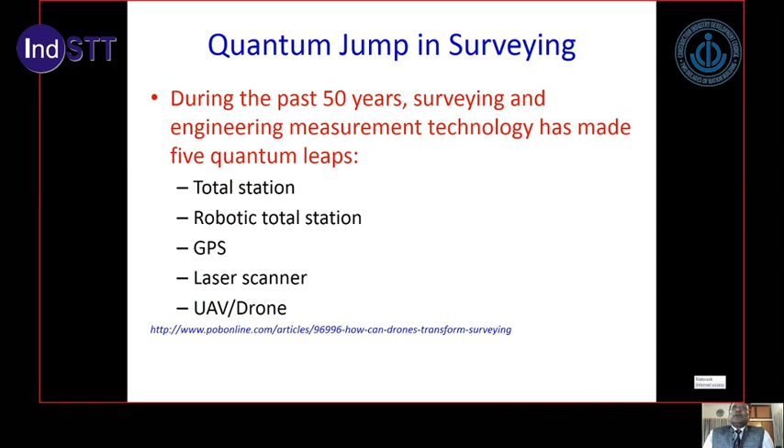Now, why should we use laser technology? This laser technology basically will give us very accurate three-dimensional coordinates even in adverse weather conditions. So that is why this particular technology is very useful, because we get a high degree of automation. It is safe operation.

It is less affected by atmospheric conditions because of fog, haze, or rainy conditions, sometimes we don't use surveying equipment. It's very efficient, and we achieve very high post-processing efficiency from this.

Now there are advantages and disadvantages of using this technology. The greatest advantage is that we get three-dimensional data, which is the ultimate goal of any surveying equipment. Once we get three-dimensional data, we can create a 3D model, a virtual model, and carry out measurements from those 3D models, getting accurate coordinates of the data.

The disadvantage could be that it requires experience to use, and the hardware and software are a little expensive, things like that.

Now let us see on what principle this laser beam based equipment works. We have a receiver in the instrument and we have the transmitter, as you can see, two boxes, the blue boxes showing the receiver and transmitter, and then we have the target surface. This target surface could be a building, a tree, or a tower where the laser beam will strike, and this will return back, and the reflected laser beam will come to the receiver, which decodes it and converts it into digital signals.

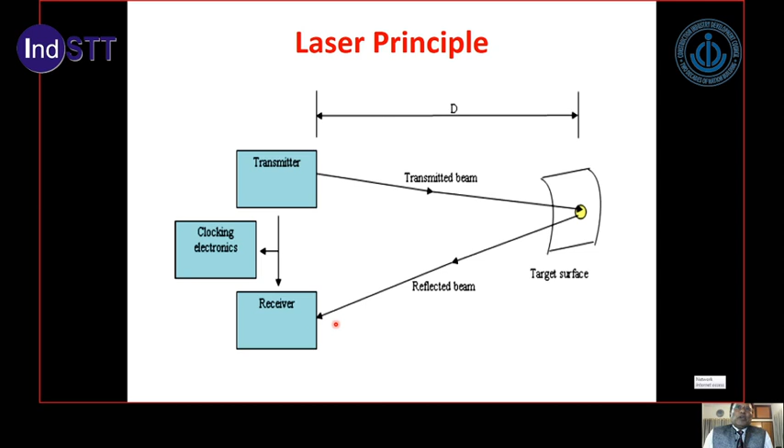We have three types of LiDAR systems: terrestrial laser scanning systems, which are used in surveying, then mobile laser scanning, and airborne. As is clear from the name itself, we have a system which you can mount on the ground, very close to the object, that's called terrestrial laser scanning. When you mount this system on a mobile system like a vehicle, that is called a mobile laser scanner system.

When you are mounting this system on some aircraft or UAV drone, it is called an airborne laser scanning system. I'm discussing all three here. This is a ground based system.

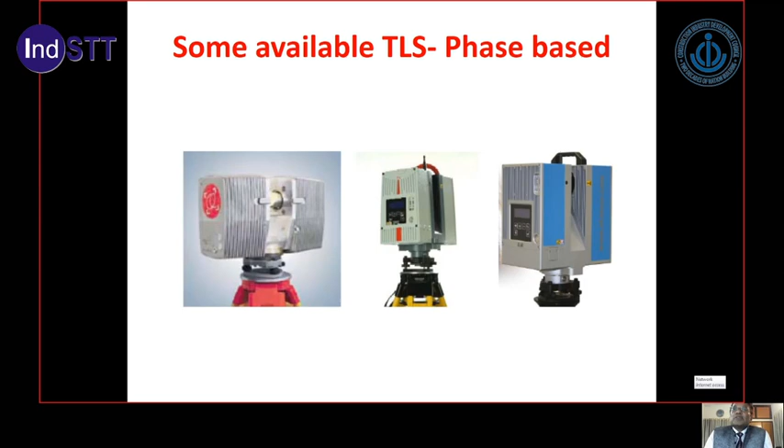These are some available phase-based latest equipment which are available in the terrestrial system. We can use them for a very large number of applications. Archaeology is one of the biggest applications, then architecture and construction is another big application. We are using it for heritage preservation, and we are creating virtual reality.

In addition to these applications, we are also using these for slope stability monitoring, like landslide monitoring. We are using it in the forestry sector, shipbuilding, forensic, biometric. So you can see here that it is not just land surveying, but we are using it for multifarious applications.

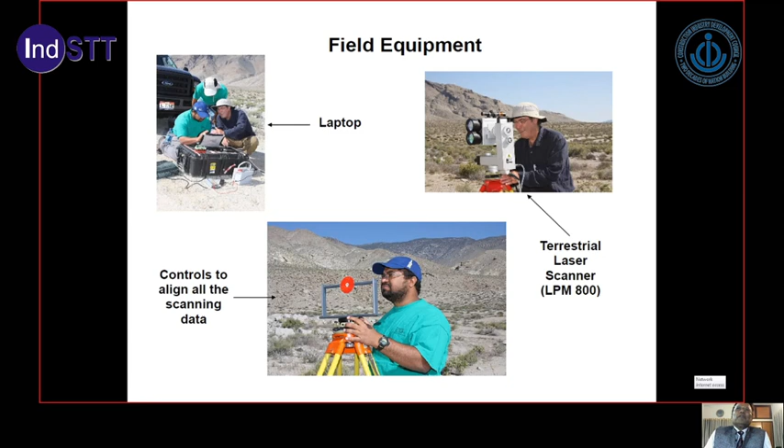Now how the instrument looks like, you can see the top right figure, which is the terrestrial laser scanner, and top left is the laptop device which is connected to that, and a power source, and there is a target on the bottom. So these are the devices which are required, and you can see in this diagram that on a building face several measurements are being taken with the help of the terrestrial laser scanner TLS system.

The dots which you see on the face of the buildings are those points where the laser beam is exactly striking the building and collecting three-dimensional X, Y, and Z data from these points. So a very large number of points of data will be collected, and these are called the cloud points. So you can actually recreate the entire building.

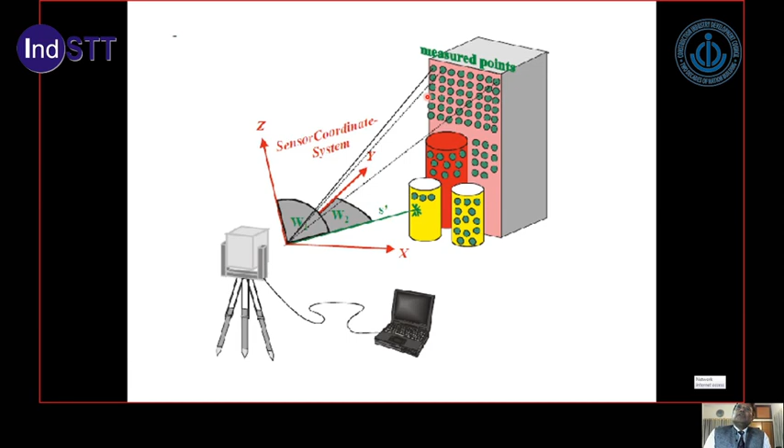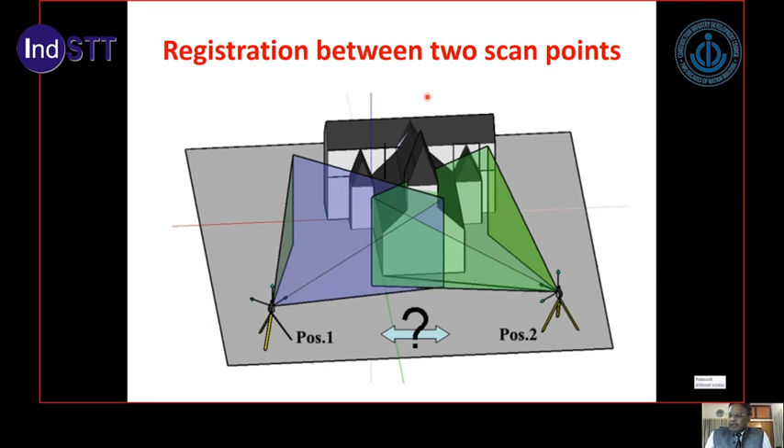Now we will also like to create a 3D model. So that means we have to use the photogrammetric principle, and we are capturing the image from different positions. So different positions will give you the overlap also, and the correct geometry you can recreate for the object.

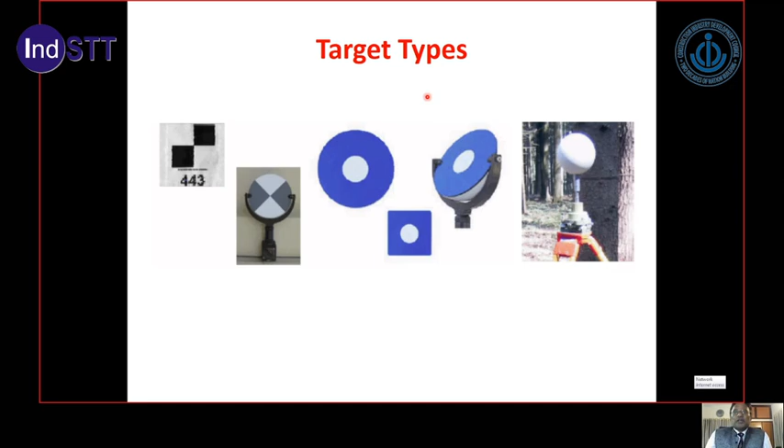Now on the building face, or maybe on a dam site or on a tower, we have to install these target types, and sometimes the coordinates of these points are also known to us, so they act as a reference point. So if I put these on the face of a certain building or structure and I know the coordinates, I can use them as GCP's, ground control points.

But the modern device can take the data all around you automatically. So it has made the surveying work easy, data collection work very easy, and you can collect a large amount of data very easily, quickly, and very accurately with the help of this kind of equipment.

There are certain technical steps which one has to follow in order to get the correct data. So we start from the survey plan, we carry out the field operation, then we go to the data preparation and the data registration with the help of the ground control points. Then once you have collected the data, you need some kind of software, and that's your data processing software. And then once you have done the data processing, then the last point will be quality control and delivery.

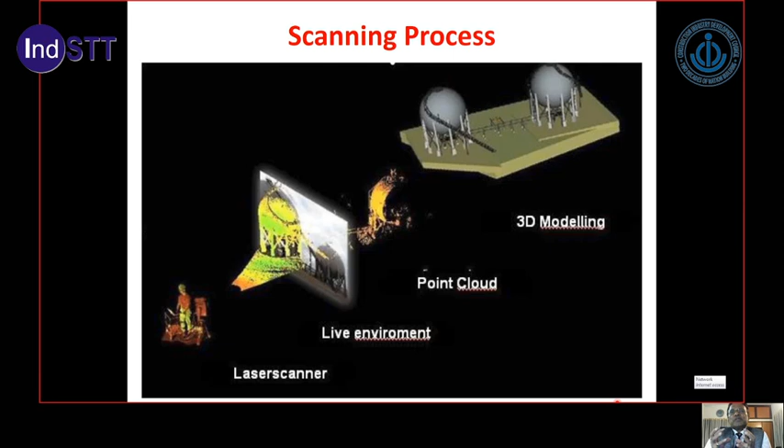A very dense point cloud data could be confusing. You are not able to see anything out of it because it is so dense, and every single point has three-dimensional coordinates attached to it. Now you have to do certain editing, cleaning of the data, and be selective about what you want from it. There are certain procedures one has to adopt, because the laser scanner will scan everything visible to it and will have the coordinates of those points.

We can use this particular data for dam sites, like deformation in the dam, bridges and deformation in bridges, towers and inclination or verticality of the tower. All that kind of study, the cracks developing in structures, can be very easily monitored with the help of the terrestrial laser scanner device.

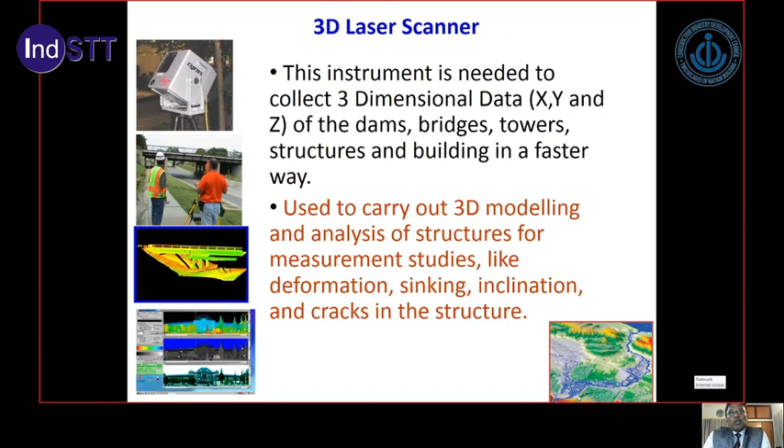Once you have this kind of data of the building, you can calculate all the dimensions of the building, carry out measurements, and calculate the volume of the building. People have also done studies on how much money would be needed for color washing or painting of the building. That kind of computation can be carried out with the help of this data.

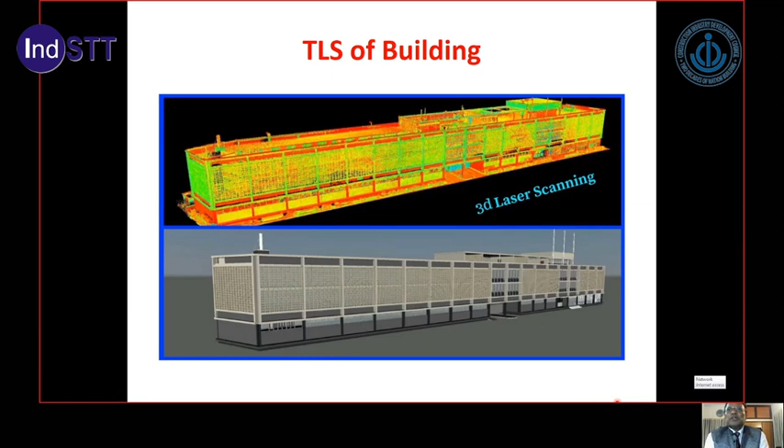The deflection in the bridge, when a train is passing, there is a deflection in the bridge. When a heavy load is passing, there's a deflection in the bridge. So whether the deflection is within the permissible limit, or whether the bridge is old and needs replacement, and so on, can be assessed.

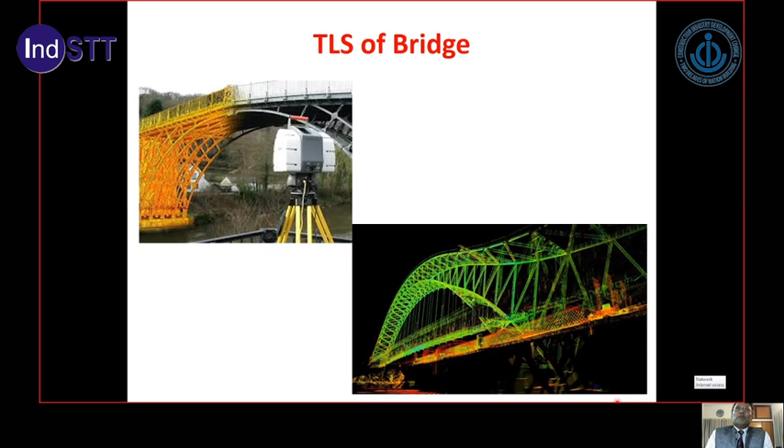In civil and infrastructure work, this is used for road and rail surveys, for volume calculations of material, for tunneling, for topographical surveys, and for monitoring the performance of structures. For all these purposes, we can use different kinds of laser scanners.

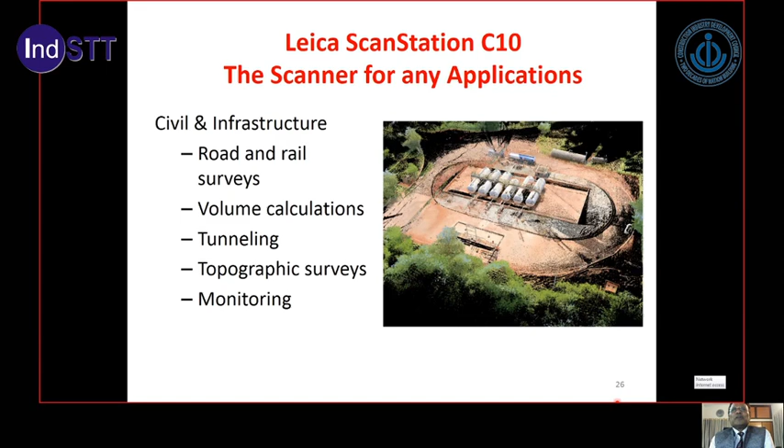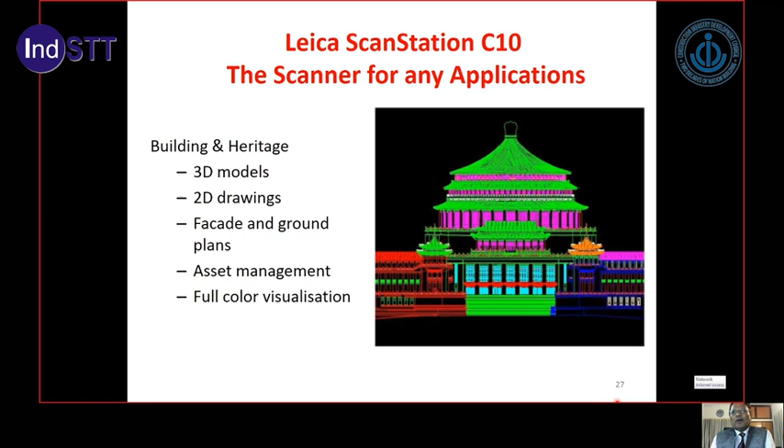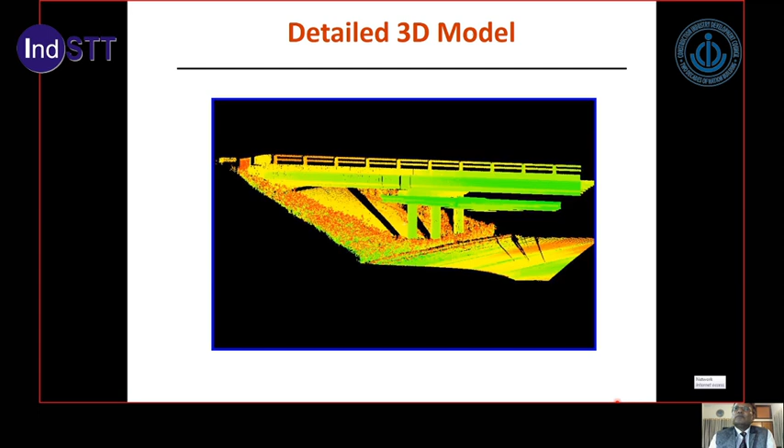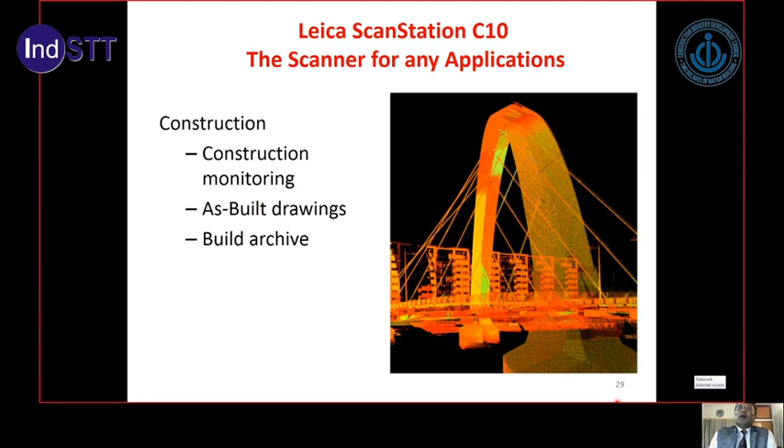This again shows the terrestrial laser scanner being used for the monitoring of the construction of the dam or the bridge site. From the 3D point cloud data, one can create these kinds of 3D models.

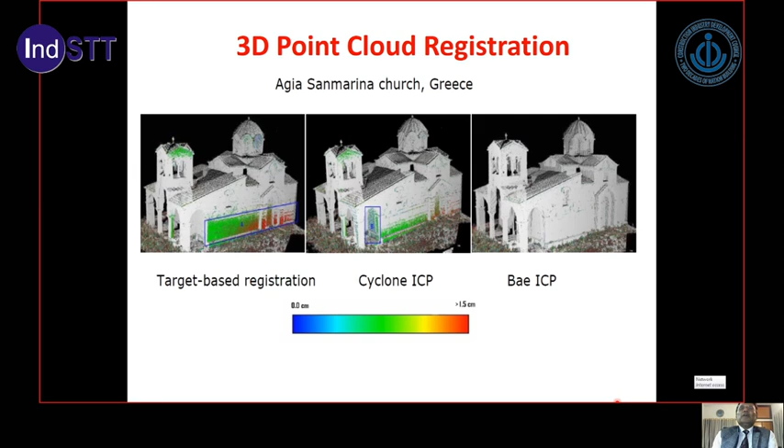The second category is the mobile mode of the laser scanner, where we have a specially designed vehicle, and we are mounting our system on it. This is the complete system which has been mounted, and it is equipped with the camera, the GPS, the IMU, and so on.

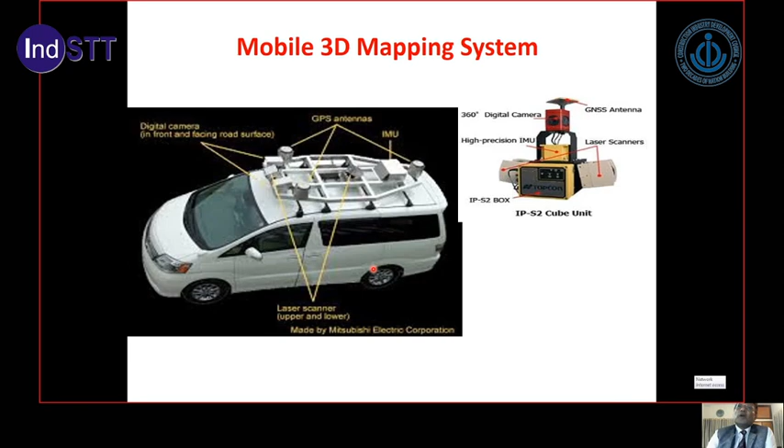So these are the details of this. You can see we have GPS devices on the top, we have the IMU, and we have a 360-degree camera here. This camera will take pictures in all directions as the vehicle moves. Then we have the laser scanner also, which will collect the point cloud data. So we collect both kinds of data, the image data and the point cloud data, and both are useful for different applications.

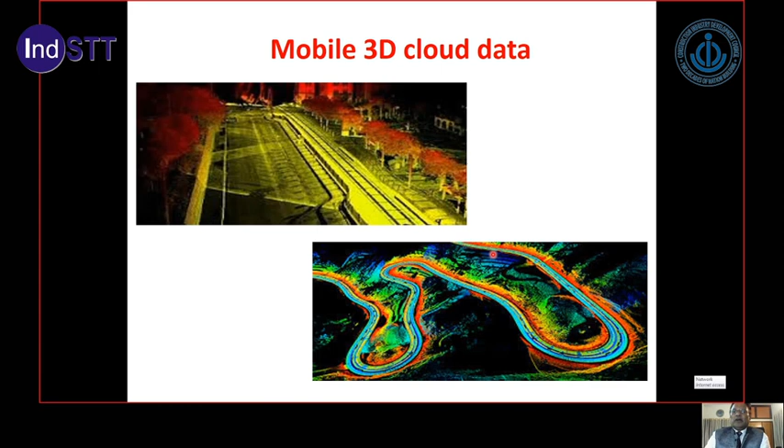Now you can see the bottom picture is the road, the entire mapping of the road and the surrounding areas has been done. This is a hilly region, which is why you see so many curves on the road. As you move in the vehicle under normal circumstances, the instrument is automatic. It will collect data on both sides of the road, as well as the backward and forward data, which is very useful in a large number of studies.

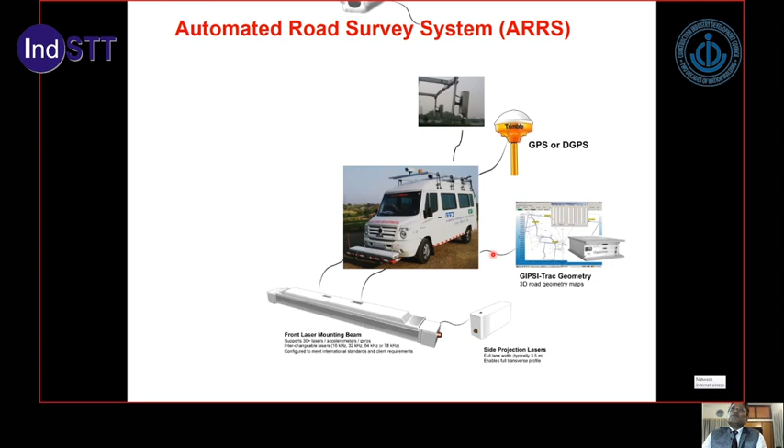This is an automated road survey system available with the Central Road Research Institute, and it is a very useful device with a laser scanning system. It has GPS devices fitted to it, it has a digital camera which takes images, and then there is the data acquisition system.

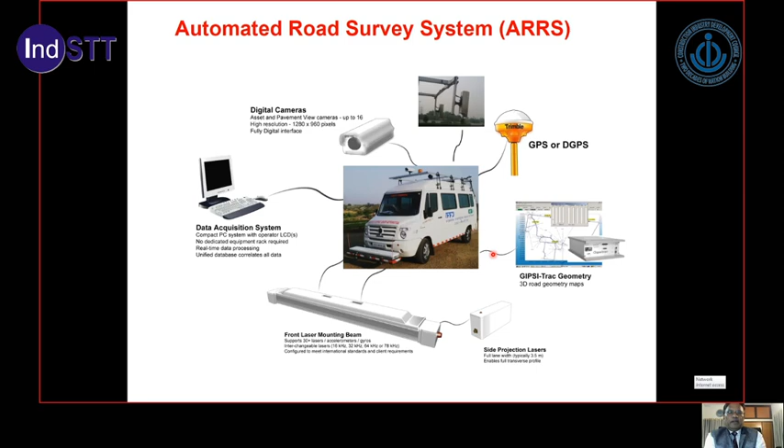Sometimes we have to carry out the analysis when we bring the data from the field to our office. But the advantage of this system is that you can do the analysis of the data in the field itself, in real time. There is real time data acquisition through a system fitted in the vehicle itself, and you can analyze and see whether your data is correct, and what the behavior is.

So this is a very useful equipment for maintenance of the road, for assessing its condition and stresses. There are potholes in the road soon after rainfall, so how much material would be required to repair those potholes? If cracks develop, or the road is bumpy, it can give you the entire profile of the road. In the front we have the laser profilometer, which scans the entire road system, and then the camera system takes images, while GPS gives real-time coordinates.

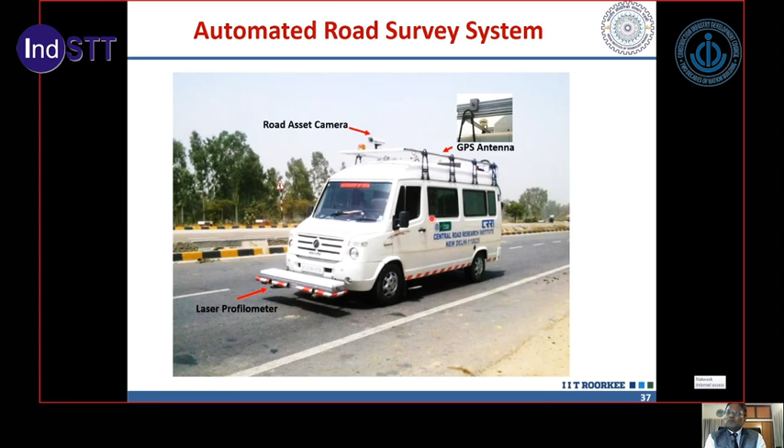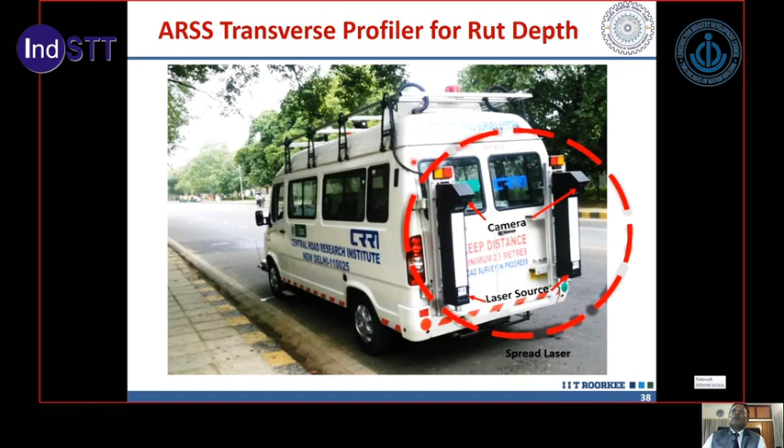This particular system has been used for a PhD work which has already been awarded. You can see these two laser scanners and the camera systems mounted on the vehicle. The two camera systems on top take images, and these images from the left and right cameras can be used to create a 3D model using the photogrammetric principle. So this is like a moving lab.

This is not a vehicle, but it is a moving lab, and it is collecting the entire data for the road survey required for its maintenance and repair.

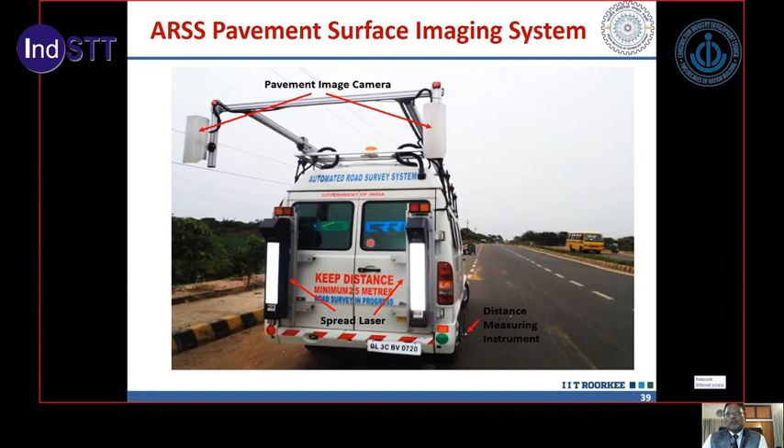You can also mount this laser scanning system on an aerial platform, either a low-lying aircraft or a drone system. Here the scanner is looking downward, and as the aircraft moves forward, it scans the entire Earth's surface.

All the laser beam dots falling on the surface of the Earth collect three-dimensional data, and with the help of GPS devices, you can geo-reference the data and get the actual coordinates.

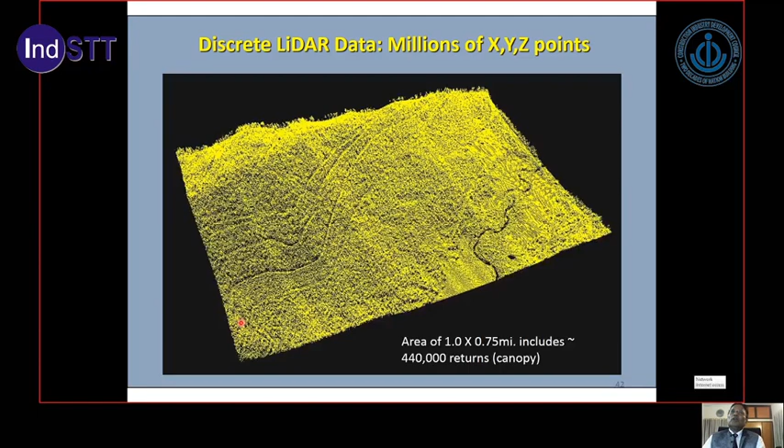Blowing it up further, you can see the height of the trees as well as the surrounding bare soil or sandy area. One can carry out measurement of the biomass from this kind of data, and also find out suitable sites for plantation of trees. So one can do a detailed study.

3D flood modeling: our country faces a lot of problems due to flood, and flood is never studied in 2 dimensions, because it is a function of the slope also. So we study flood in the 3rd dimension, and laser scanners mounted on aircraft give us very useful data for this.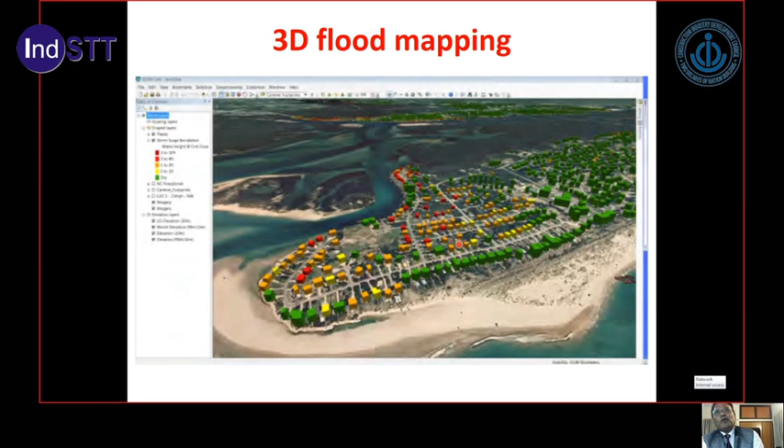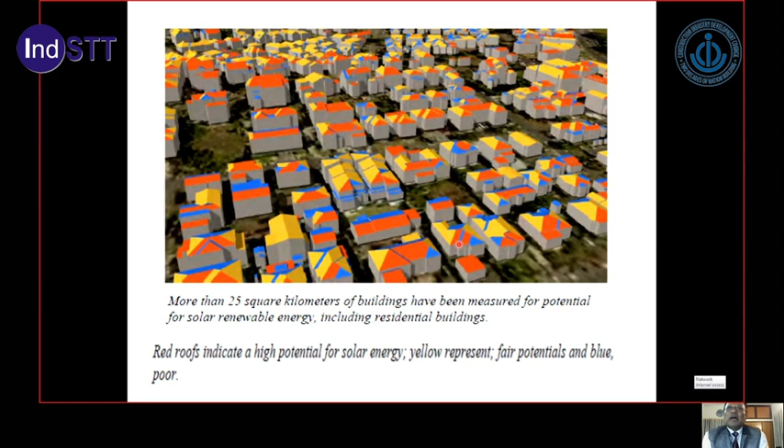Here the rooftops oriented in the proper direction are shown, with red indicating high potential. We can identify which rooftop gives the maximum area for a solar plant or solar panels, along with the orientation of the rooftop.

There are a very large number of applications of the LiDAR survey. Some are related to civil engineering, but others lie outside civil engineering. The common thread is the mapping or data collection aspect and its integration with other data, such as remote sensing data.

The other very useful technology coming up is drone technology, technically called the unmanned aerial vehicle (UAV). You must have seen drones at marriage parties or functions, taking images of the area.

If we see, the pictures from space were taken way back in 1849 from a balloon, a low height platform. Then the Kettering bug, which was used in World War One, flew to a certain height and took images, and this has led to the development of drone technology.

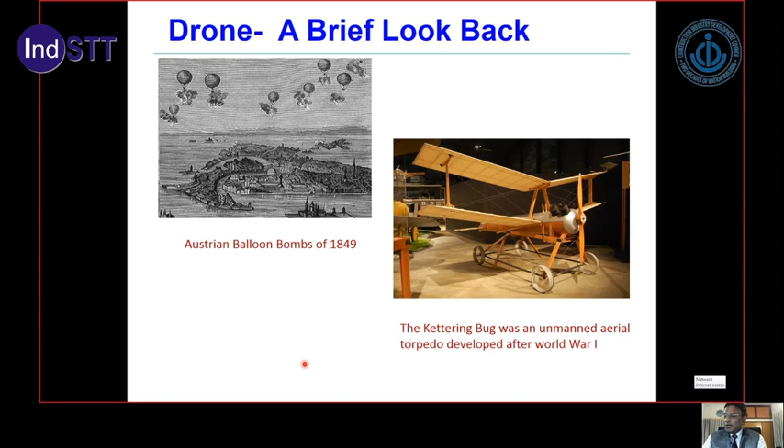Queen Bee was one of the first returnable, usable UAVs which was in practice. The drone term has come from the Queen Bee, and if you see the shape of the bee, the drone is similar to this kind of shape. So the drone has derived its term from the term bee.

Now, if you see the technical term, they are called unmanned aerial vehicle, UAV. They are called unmanned aerial system, UAS. They are also called remotely piloted aircraft systems, RPAS.

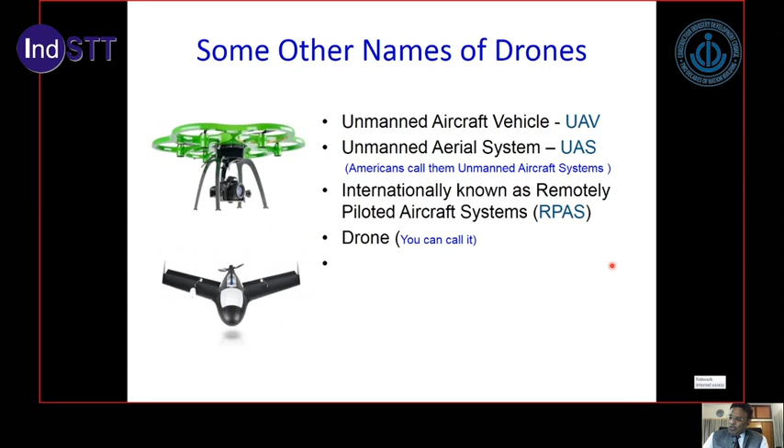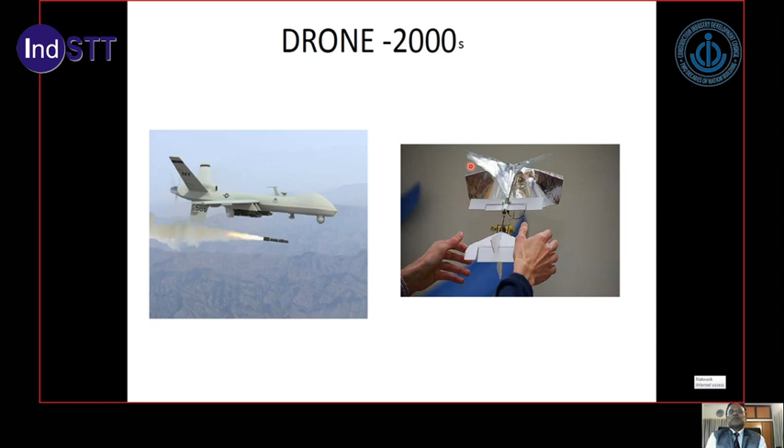These systems have developed over the past few years, and this diagram indicates the development which has taken place right from 2000, and this is continuing, and we are getting better and better technology, better sensors and software in order to analyze the data for different applications. Earlier it was combustion engine platforms, and now we have electric platform engines. In drone 2000 onwards, it has completely changed, and we are having systems which are very small in size and have a lot of flexibility.

So UAV is a remote controlled pilotless aircraft which is flying without people inside controlling it. You control it with the help of some controller, while autonomous remotes you are not even controlling directly, but there is a ground station which is monitoring its movement. So you don't have the pilot inside, and you control it with the help of some gadget or device on the ground.

We have two basic types of drone. One is the fixed wing, so this wing is fixed, and another is the rotary wing, where we have vanes rotating, 1, 2, 3, and 4. So we have the fixed wing type and the rotatory wing type; these are the two broad categories.

The fixed wing type requires a certain kind of runway, because it requires horizontal movement to get thrust and then fly up in the air. But rotatory wing can go vertically up directly from a small ground area or rooftop, so it doesn't require a runway. That's the advantage, but there are other features too: fixed wing is always moving, it cannot be stationary at a point because it requires thrust while moving. But the rotatory wing can be stationary at a point because thrust is generated by the wings themselves, so it can be used for surveillance, monitoring one area continuously for a long time.

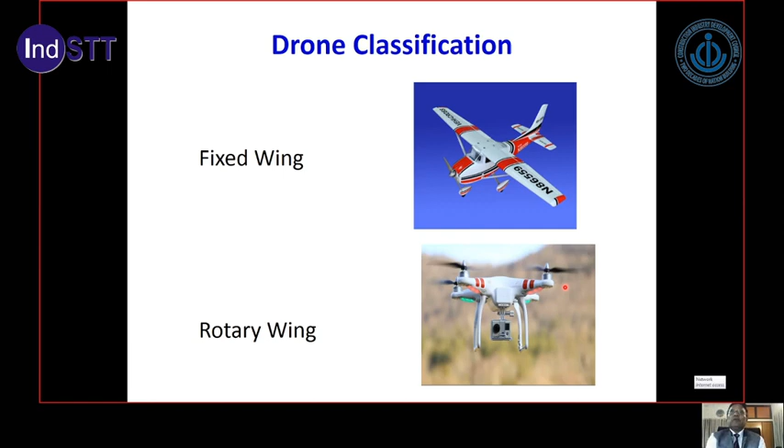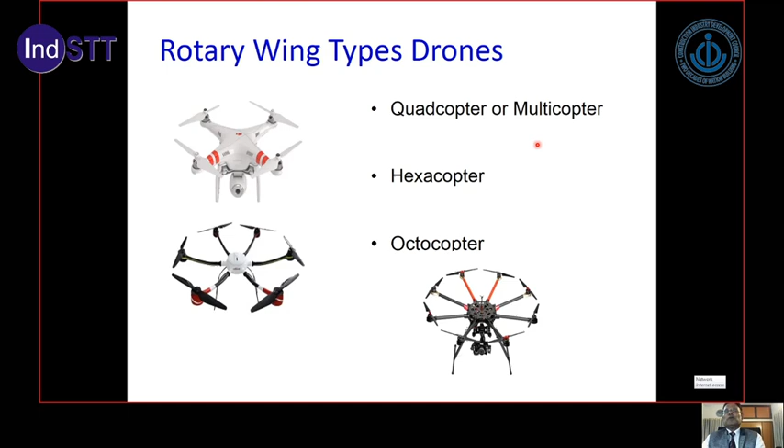Under rotary wing types, we have the quadcopter or multicopter. Quad means 4, so there are 4 different wings and vanes. Then we have the hexacopter with 6, and the octocopter with 8. These are also known as multicopters, very useful, and most of the time you will find the quadcopter is the most commonly used UAV for surveying and mapping applications.

They are also classified according to weight. Some drones are very lightweight, we call them small drones, and some are a little heavier. The heaviest drones are used for military purposes and not for civilian use. Here we are mostly talking of drones which are used for civilian purpose, for commercial use.

If you look at the anatomy of the quadcopter, it has various components. It has a camera system, as you can see, on the camera gimbal system. The gimbal is basically the frame that supports the camera system. It could be a multispectral camera giving images in several spectral wavelength bands, or it could be a thermal infrared camera, things like that.

It also has sensors attached. Suppose I want to sense the temperature or the environmental condition of the area, so there could be several sensors installed. Then there is a flight controller and motor systems and so on.

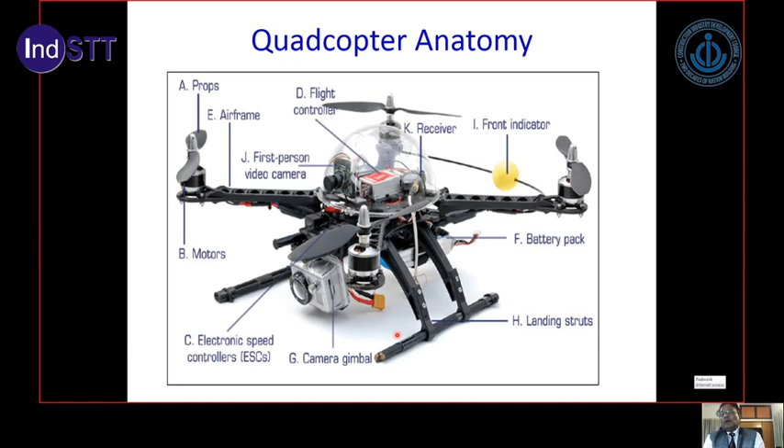These are the different components, then there is airspace classification, because there are certain restrictions. One cannot fly it anywhere, or to any height, or to any distance. In fact, one has to take permission, and these regulations vary from country to country. So one has to read and understand those regulations before flying to a particular area and location.

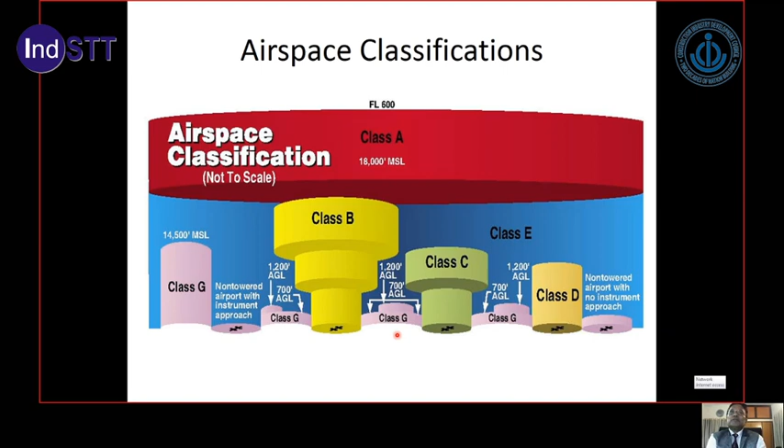And there are certain areas which are restricted, like the defense area is restricted, the airport is restricted, and certain forested areas, where it is not allowed to fly the UAV and take images.

Then there are certain terms which are used, like autonomous terms. Like we have autonomous cars now coming into the market, so they are based on the same principle. So we have autonomous drones where the drone will fly to well-defined points up in the space. So GPS is helping us, so we have predetermined the coordinates of those points and the UAV will fly to those points.

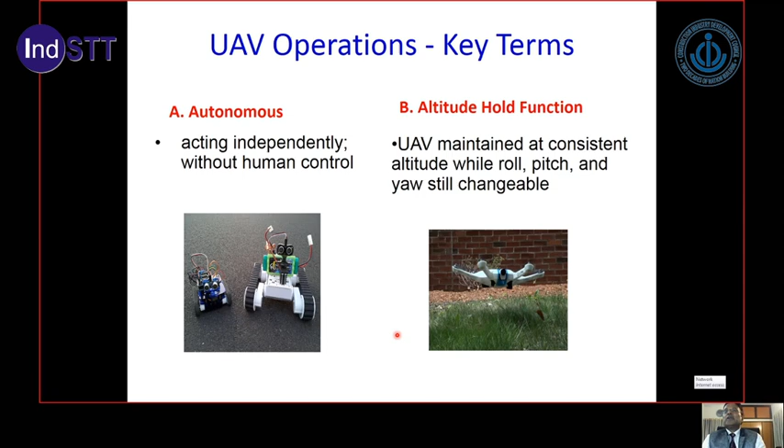Then there are automatic ones also. They can take a detour of the planned route in case the environmental condition is changing. Then altitude hold means that it can stay at a certain height for a distance. So there are certain terminologies which we are using when we are flying the drone.

Now, this is a study which shows that if we do land surveying or if we do the survey with our drone system, how much is the difference? What is the cost comparison? On the y-axis you can see the cost in US dollars and the size in acres. As the area increases, you can see the green line, which is the land-based survey, the cost is increasing. So it's a linear function. But in case of a drone, it is not a linear function.

You can see that cost almost remains the same if there is not much variation in the area. But if you go from 1 acre area to, let us say, 41 acres, even then there is not a significant increase in the cost. So we can save a lot of money also from this.

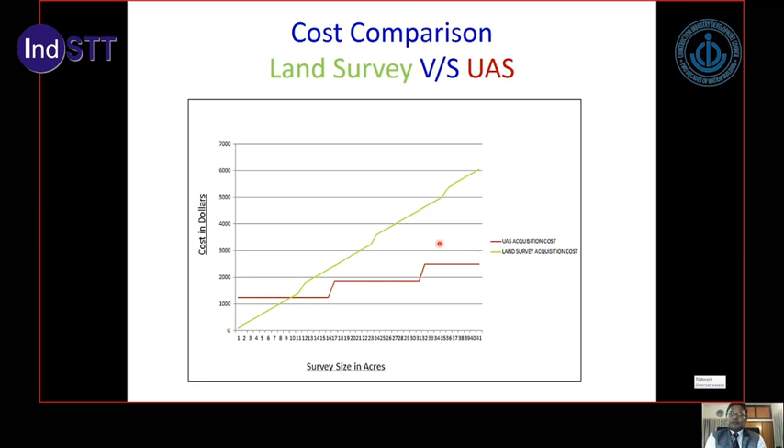What are the other advantages of the drone survey? High speed of data capture. We can work with 1 or 2 persons with this. We can collect a very large number of data with high efficiency, and the best part of it is the high spatial resolution data, 1 centimeter per pixel, and no technology can give us that high resolution data in such a short period of time.

Now there are a very large number of commercial uses of the drone, as you can see from the slides, that people are using for different industrial use. But if we look at the construction sector, in construction site management this is being used very frequently in foreign countries.

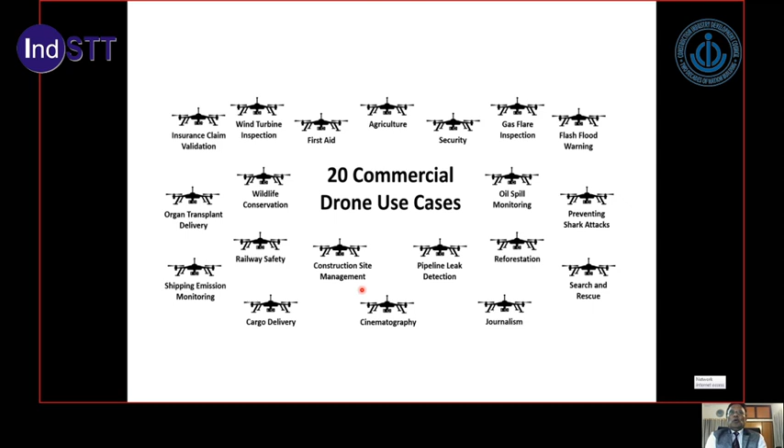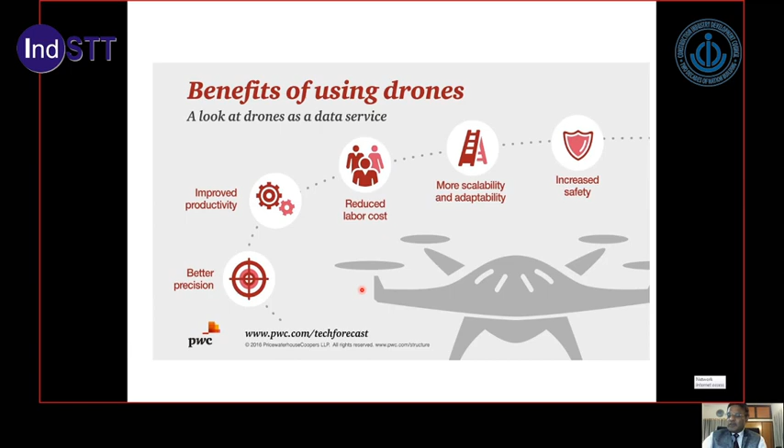Now, these are the benefits. We are getting very high precision, we are getting improved productivity at reduced labor cost, and we can scale the data, and adaptability is more, and increased safety. So these are the additional benefits which we are getting.

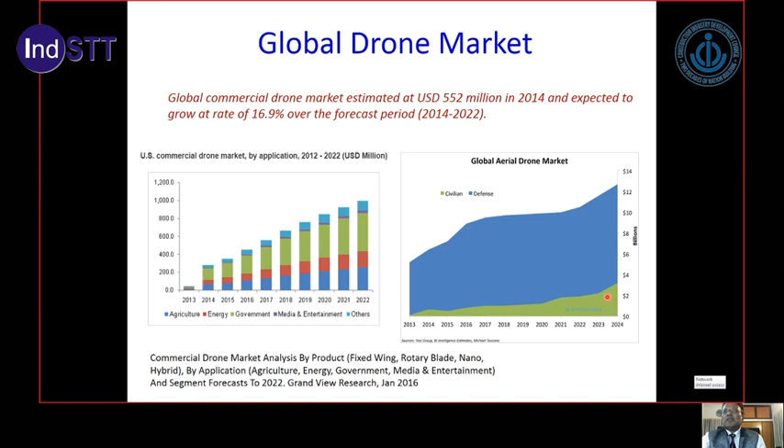Now, if we look at the drone market, the potential of the drone. This slide is indicating that we have a very good market, shown in 2022, or here it is 2024. So we can see that globally, the world over, it is on the increasing side. The market of the drone is very good, but it shows that more of the application is on the defense side. The blue color indicates more defense side use, and the green one indicates civilian use of the drone.

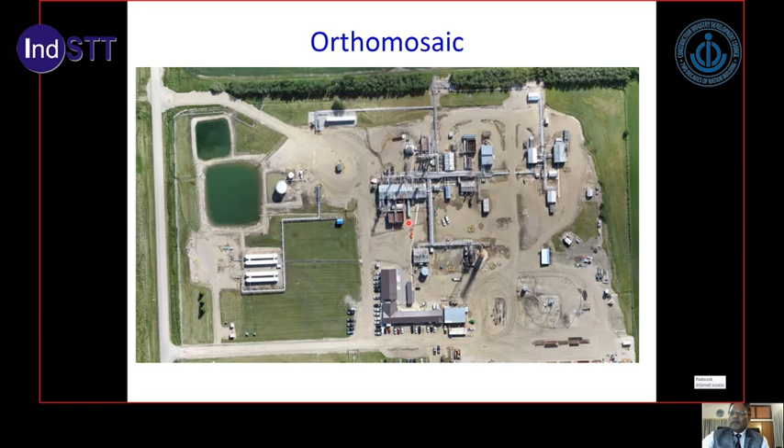You can also create the orthophotos. Once you create the orthophotos, you can carry out accurate measurements, and it acts like a topographical map. This is the orthophoto of an area which has been created by joining several images, and now this is just like a map, a topographical map, and any measurement you carry out on this is as accurate as a topographical map.

Then we are using it in construction. As civil engineers, we are very enthusiastic to use it for construction of facilities, whether it is a road, a big stadium, a big building structure, or a dam site. Then inspection of the infrastructure - physical inspection may not be possible to go to that particular site during construction or post construction, so this inspection is done with the help of the drone.

And in Arunachal Pradesh, this is being done. The drone is sent to rough sites, tough terrain where it is not possible for engineers to go every day, and they are inspecting their sites - the construction is being monitored with the help of the drone. Then safety and security.

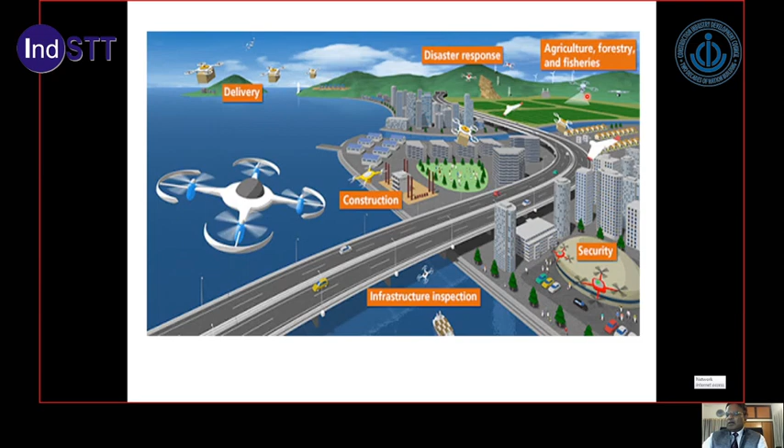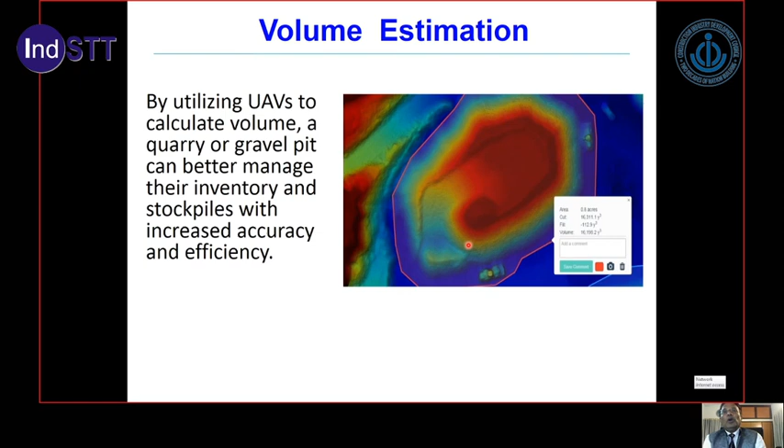Volume estimation - we require this in our projects, in our construction projects, in infrastructure development projects, we have to many times calculate the volume of the earthwork. So it can be used to calculate the volume of the earthwork. This example shows how the drone is useful for the construction industry.

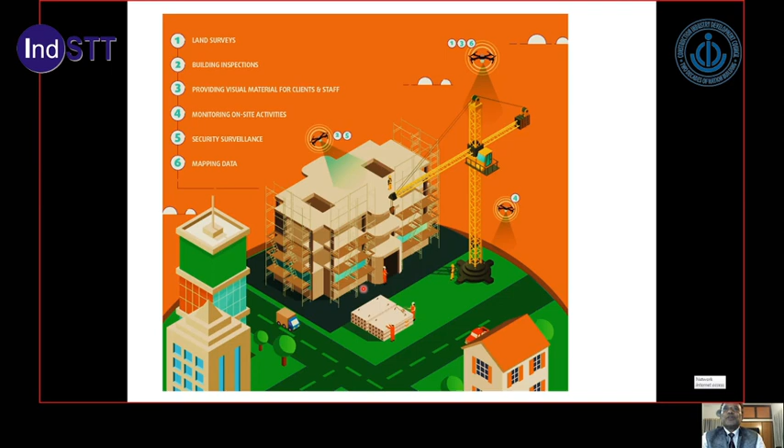We can also identify, once we collect those high resolution images, unauthorized construction. This is another big problem in many countries, including India, where permission has not been taken from the municipality, and people are also saving a lot of taxes - they don't pay taxes but construct additional area without approval of the local body. So unauthorized construction can be easily found once we have the repeated images.

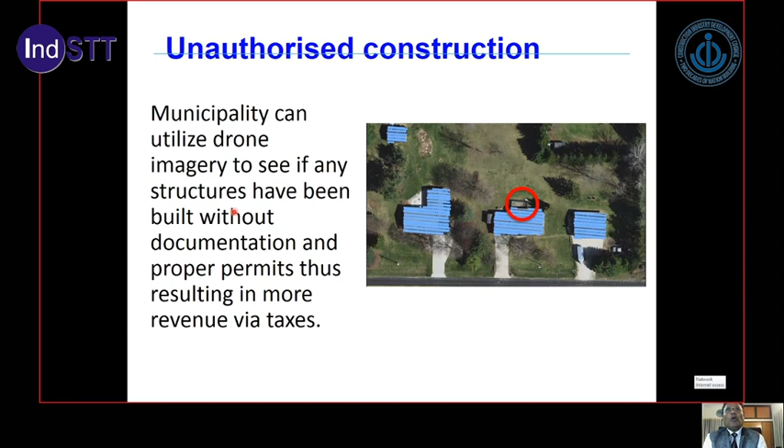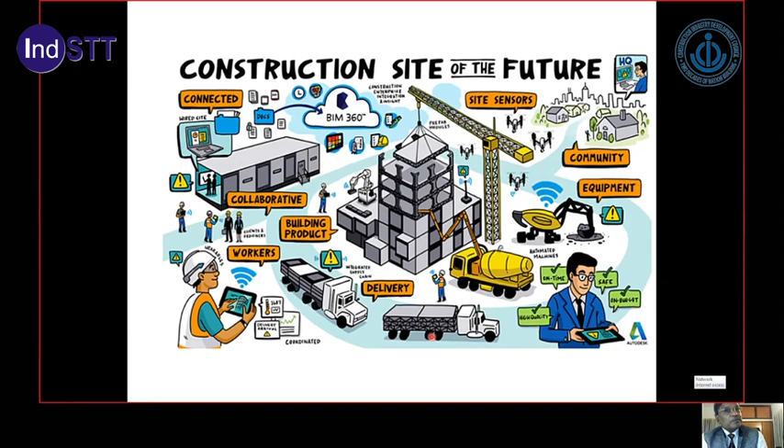In road transport, what we call the intelligent transportation system, drones are also helping us in speed control of vehicles. In foreign countries, the speeding of vehicles is checked with the help of drones. Then identification of the plate number for vehicle tracking, traffic counting, traffic monitoring - this is all done with the help of this particular technology.

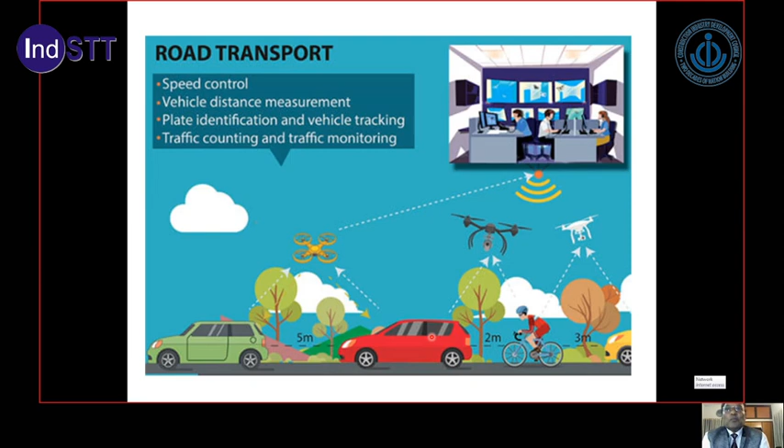In a smart city, it is being used in a large way. Design of a smart city would require actually wireless sensor networks, autonomous systems, which use the UAV and micro UAVs. So in foreign countries, the UAVs are basically collecting real-time data and providing real-time data, and that is the main idea of smart cities.

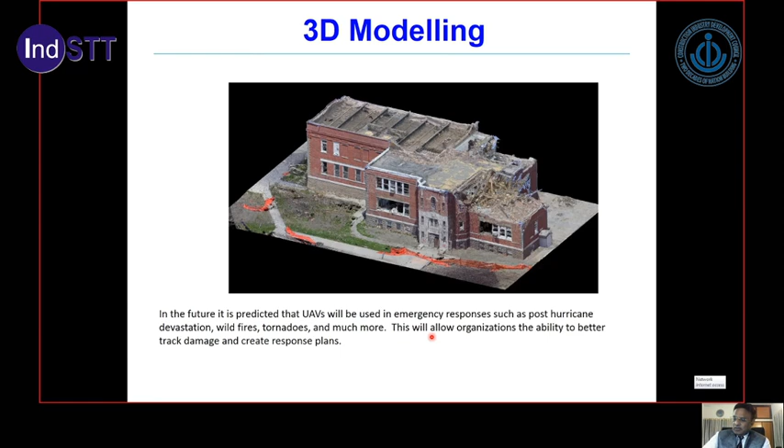Then in industrial applications like leakage in the pipeline, this is all maintenance of the pipeline, or leakage in the pipeline that is being monitored with the help of such drones.

A very interesting application of the drone, which is gaining popularity, is in filmmaking. So far we were using video cameras, handheld cameras, for capturing the shots of the films. But nowadays drones are being used because permission has been given to use drones for filmmaking. So this is another interesting application.

And entertainment is another. The entertainment industry is coming in a big way where drones will be used. One example is the Lady Gaga Super Bowl show, where several drones were flown up in the sky, and during the night time they were used for illumination purposes to make a particular shape, like the 100 drones light show. So for entertainment purposes, for light and music shows and other things, drones are being used in a very big way.

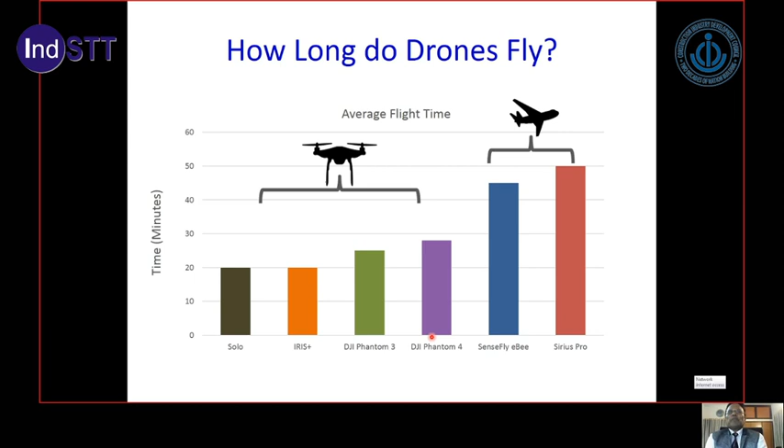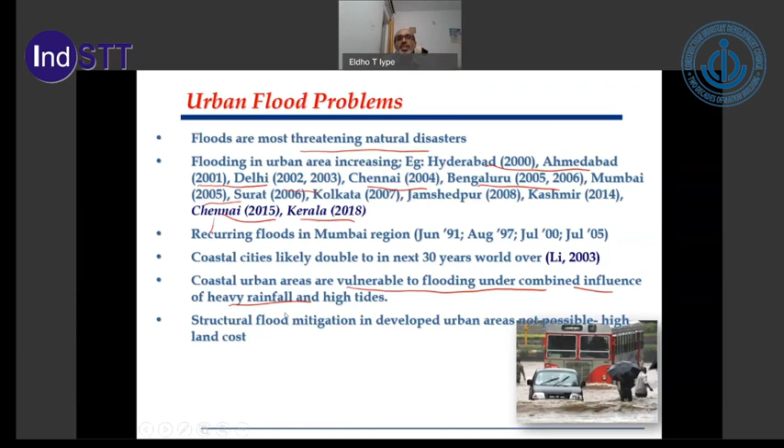So in terms of flooding, flood impacts and solutions. As I mentioned, flood is a major disaster. It has huge impacts in terms of economy, environmental impacts, health impacts. Some people can die. There are so many issues that can take place with respect to flooding.

For example, the Mumbai flood that happened in 2005. Deaths in Mumbai were reported as around 500, or 454. In Navi Mumbai it was 66. About 70 crores rupees were lost to MIDC in the TTC belt. So much of these issues took place in the July 26, 2005 flooding in Mumbai.

And if you look into the Chennai floods in December 2015, more than 400 people died, and there was an estimated loss of more than $7 billion. More than 2 weeks there was disruption in the city.

And in recent times, Kerala 2018, a very, very severe flooding took place in August 2018. More than 300 people died, and economic loss was estimated at more than 30,000 crores, with disruption of many places including Cochin Airport for more than 2 weeks.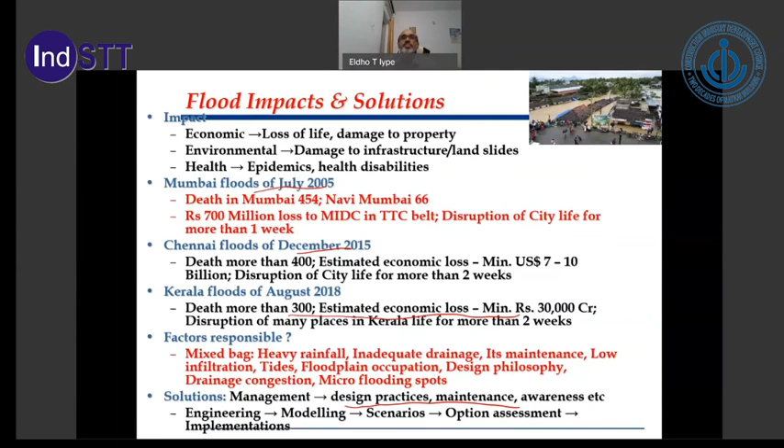As I mentioned, in India this flooding is a major problem, and you can see that due to climate change impacts, reported over the last 2 decades, and due to drastic changes as far as land use and land cover are concerned - especially in coastal areas, flooding is increasing. There's been a series of events over the last 20 years. We can list some of them: Kerala floods in 2018, Chennai floods 2015, Uttarakhand floods in 2014.

And especially in the eastern belt, from the Bay of Bengal, you can see cyclone is a major problem, and the flooding problems due to cyclones. These are also significant, especially in this area.

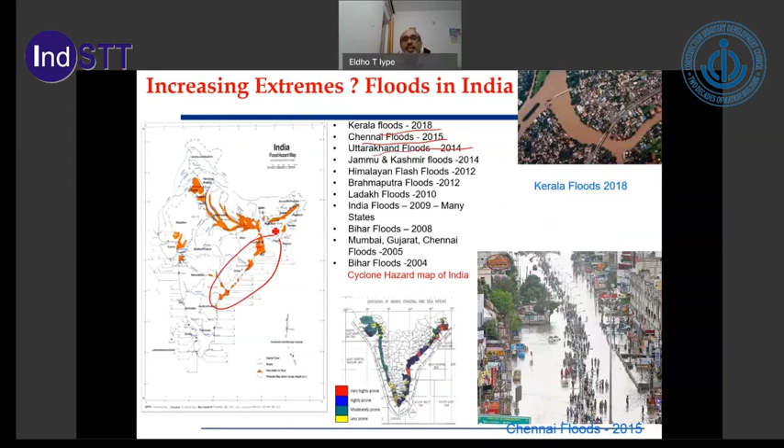When we look into flood management, as I mentioned, it can be heavy rainfall or various other reasons. Over the last few years we've been talking about climate change - whether it's due to climate change or human interventions, all these things we need to look into in a holistic way.

Climate change will have a significant effect on regional or local hydrology. This is very much visible in India over the last few decades. Alteration of hydrology caused by climate is so complex - what can happen in future is unpredictable. Now we can create various scenarios using global circulation models or general circulation models, to create various projections.

These warming climates have potential to intensify the hydrological cycle as far as hydrology is concerned, intensify hydrological extremes, and cause changes in rainfall seasonality.

So we can see there can be human interventions as well. As far as human interventions are concerned, mainly the change in land use and land cover - urbanization is increasing. If it was hardly less than 20% say 20 years back, now it's going to more than 40% urbanized areas in India. So we need to see that human interventions - changes in land use, land cover, crop shifts, mining, deforestation - all affect flooding. Dams and diversions change river courses and river flow patterns, and rapid growth in urbanization increases issues in various areas.

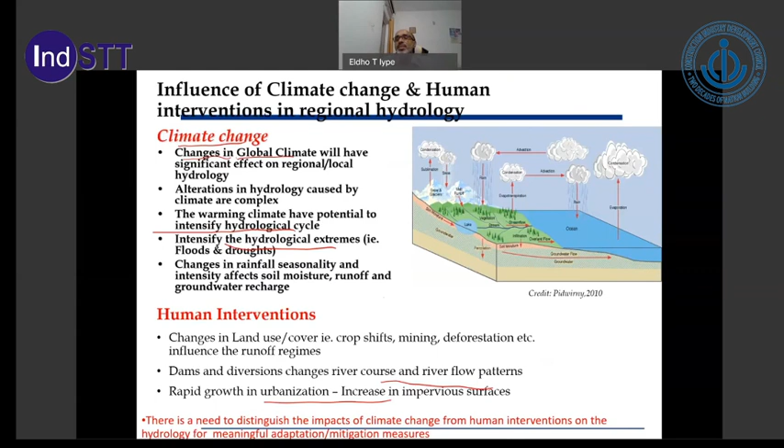There is a need to distinguish the impacts of climate change from human interventions, and we need to study this in detail when we talk in terms of smart city development.

This slide shows flood impacts and management. Consider a city like Cochin during the 2018 flooding, where many areas were flooded and water even reached the roof level. This is why, especially in Indian construction, we need to plan cities so that flooding impacts are minimal, or identify what mitigation measures can be taken where flooding is possible.

When we talk about urban flood management, there are various issues. We need to study the hydrology and hydrometeorology in detail, then see how we can forecast rainfall and flooding so that immediate water management can follow the forecast. We also need urban flood modeling and flood simulation, which we will discuss briefly here, along with flooding impacts, adaptation, and assessments. These are some of the major issues in urban flood management, especially for smart city development.

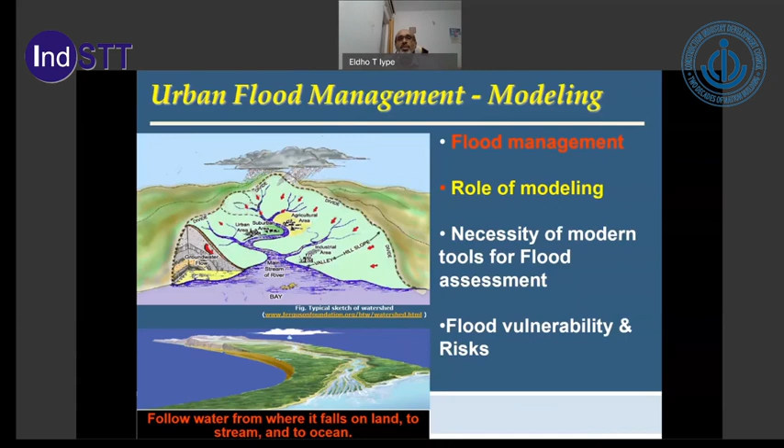Nowadays, especially for urban flooding, the process is so complex - the hydrology is complex, and land use and land cover changes are complex. So we need modern tools like remote sensing. A lot of data is required, along with geographic information systems and numerical or computer modeling. Through this we can develop flood hazard maps, and using vulnerability information on which areas are more vulnerable, we can develop flood risk maps, which is very useful for smart city development and urban flood management.

When you talk about flood modeling, there are many challenges. Key challenges include data - as mentioned, a lot of data is required for this kind of modeling, like rainfall prediction for the coming weeks, the drainage system, and most of the time a high-resolution digital elevation model so we can see which areas may flood and how much. We also need to look into interactions between different processes, like tides, reservoir releases, and the impact of urbanization.

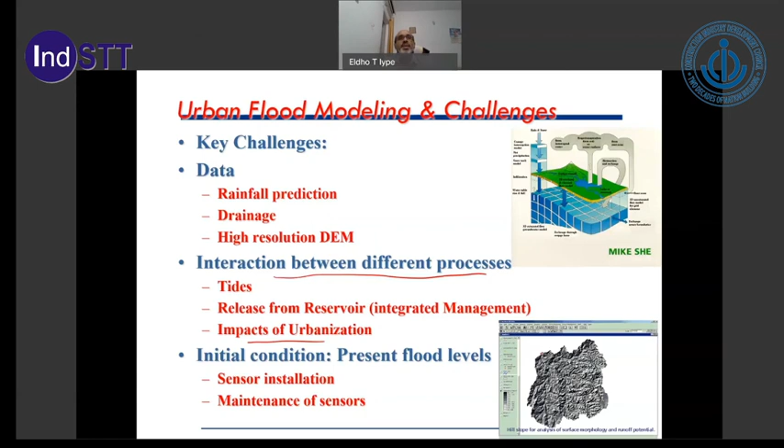As mentioned, there are many tools and efficient models available for flood management. We can integrate tools like geographic information systems, flood models, numerical models, and also use remote sensing data for all these aspects.

This figure shows integrated flood modeling - how we can develop a flood model starting from a distributed hydrological model, then get the land use and land cover map using remote sensing data, and put everything into a GIS platform. Using that, we can run the flood model to determine whether a particular area can be flooded, creating scenarios in advance like 100-year, 50-year, or 25-year return periods. Using this, we can proceed with urban development or smart city development.

As part of a sponsored project, IIT Bombay's Civil Department developed a number of flood simulation models. As part of DST, the Department of Science and Technology, after the 2005 flooding in Mumbai, we developed a flood model for a smart city. The details are available in the journal Computers and Geosciences, for those interested.

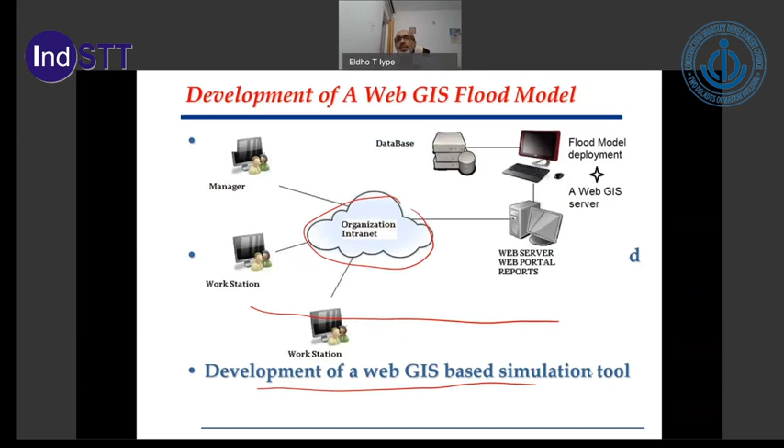This is all done using the model I mentioned earlier, using a digital elevation model, and this is the platform. For example, in Mumbai city, where the municipal corporation has intranet available, this model can be used at various locations. This is the development of a WebGIS-based simulation model, and the working methodology includes several components.

There is a WebGIS client and geospatial database preparation, then digital elevation model extraction, and as mentioned, the flood model is developed for simulation. Everything comes into a WebGIS platform, and for a given rainfall condition we get the possibility of flooding, which areas will flood, and at what depth, allowing us to create a flood hazard map. This is called the Integrated Flood Assessment Model tool.

This is the overall system. There is a WebGIS platform, and if a rainfall pattern is known, we can directly predict flooding possibilities, or even generate flood maps for return periods like 100-year or 50-year return periods. Everything was developed just like a Google map.

You can see urbanized areas, various urban zones, specifically in Navi Mumbai. We put in all this data, and if you know the rainfall pattern, we run the model.

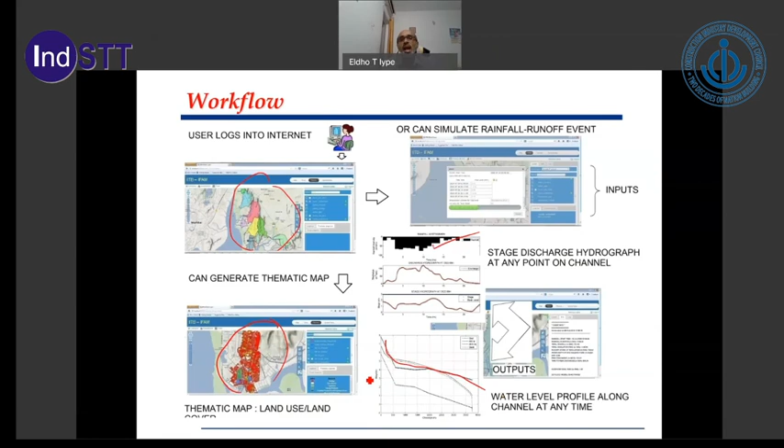Given the rainfall pattern, we can generate the hydrograph, and from the hydrograph, at various locations, determine how flooding can take place and what the inundated area is. All of this we can get through this model. The details are also available in the journal Natural Hazards, Springer, published in 2014, for those interested.

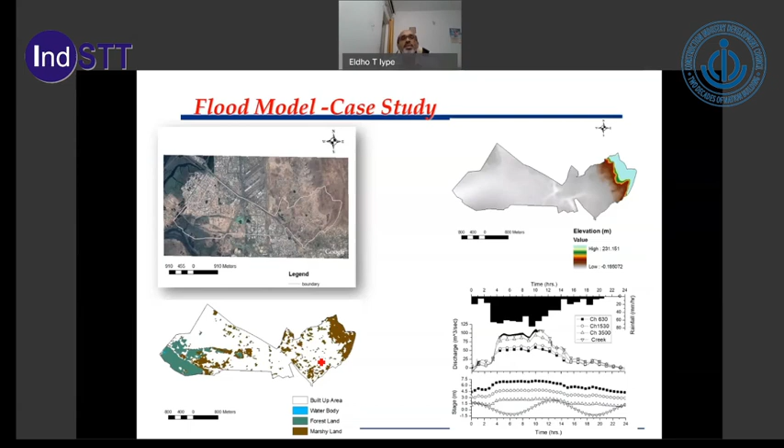This model was used to identify how flooding happens in an urban watershed in New Bombay, or Navi Mumbai. This is the area, using a detailed elevation model and land use land cover data. This area is almost 70% urbanized. Using this, with about 775 millimeters of rainfall that occurred on 26 July 2005, we simulated how the corresponding flooding took place using the model.

Now you can see how the flooding is happening. This is the beginning of the rainfall, and after 2 hours you can see how it continues. Every hour, minute by minute, we can capture the progression: 2 hours, 4 hours, 8 hours, 10 hours, and so on.

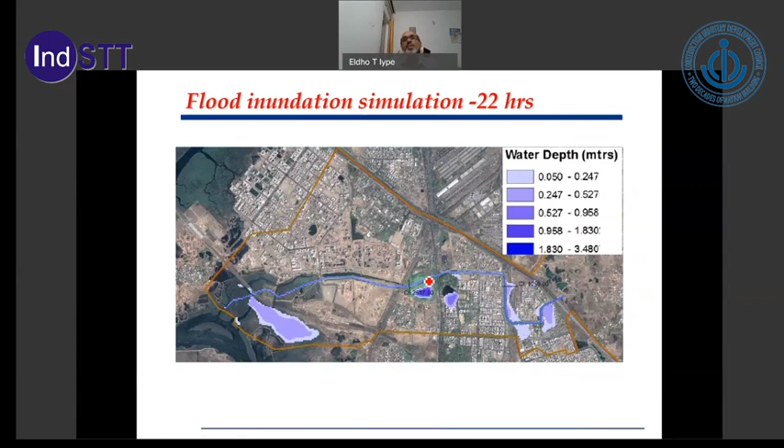Here is the creek, where the tide comes in, and here is overland flow due to rainfall. These are all urbanized areas, showing various pockets of flooding and the depth at which it occurs. This way we have an efficient tool called the Indian Flood Assessment Model, developed by IIT Bombay.

Further development was done at IIT Bombay, where we developed a flood hazard mapping system. For example, in Mumbai's Mithi River Basin, flooding happens most years due to high tide and heavy rainfall. Using models we developed, or even commonly available models like HEC-RAS and HEC-HMS, we can generate a flood hazard map, for example for a 100-year return period, showing which areas have very high, moderate, or other levels of flood possibility. These details are published in a journal paper in the Journal of Natural Hazards in 2015.

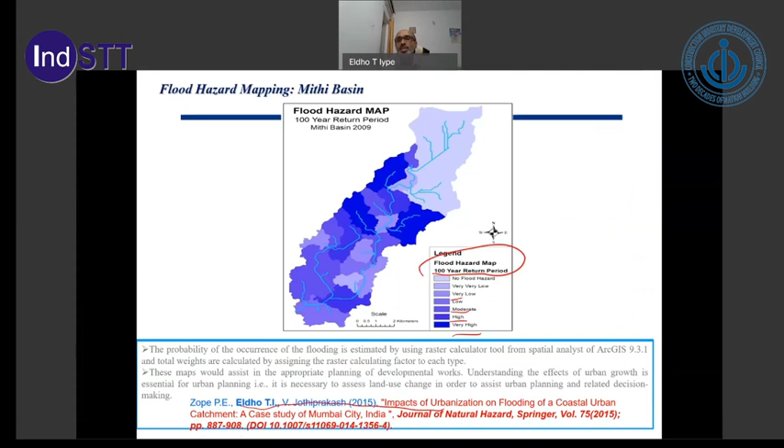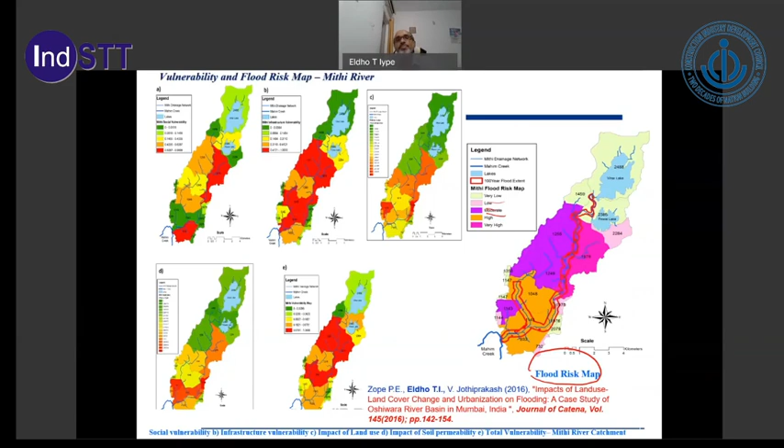If flooding is taking place or there is a possibility of flooding in a particular area, we can set up a Center for Disaster Flood Management with an organized intranet, developing an integrated flood management system to monitor and take mitigation measures, assessing disaster impact for relief response, recovery, and rehabilitation. This kind of risk management center was developed in Mumbai city after the 2005 flooding, and it is now working very efficiently.

Before closing this lecture, flooding is a major problem, especially in urban development and smart cities, and needs to be looked at holistically. We need an early warning system, and mechanisms integrating scientific, technological, and administrative agencies for effective disaster management are essential. We also need to look into terrestrial communication links which collapse during such events, plan in advance as happened during the 2005 Mumbai flooding, and consider the vulnerability of critical infrastructure like power supply and communication. These are all guiding principles for smart city development.